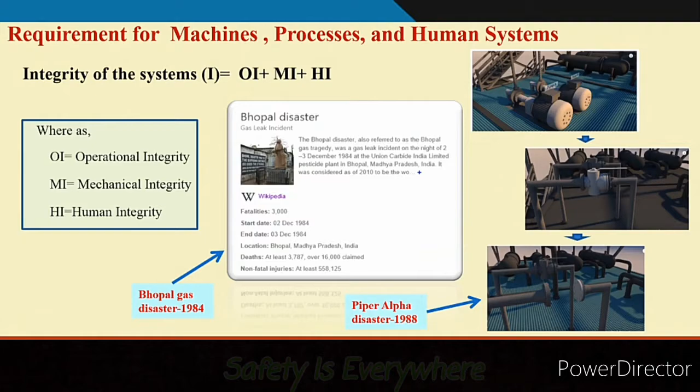So this first lecture which I am taking is on the introduction to OHSAS 18001. You agree, for any machine, processes, systems, equipment, the fundamental requirement is it should have three integrities. One is operational integrity, other is mechanical integrity, the third is human integrity.

What is this operational integrity? What is this integrity at all? The definition of integrity is that things, if they work as per your design, as per your requirement, it is called integrity. So whatever is designed, it should work in that fashion, that is called integrity. So operational integrity means the operations of the equipment or processes behave the way I have designed, the way the designer has designed. That is called operational integrity.

Let us take some examples of operational integrity. You heard of Bhopal disaster, which happened in 1984 in India, which is one of the major disasters of the industries. It happened on December '84. Many people died, around 3,000 people died. Many people had non-fatal injuries, about more than 5 lakhs. We cannot forget it. Why this happened? What is the reason for this happening?

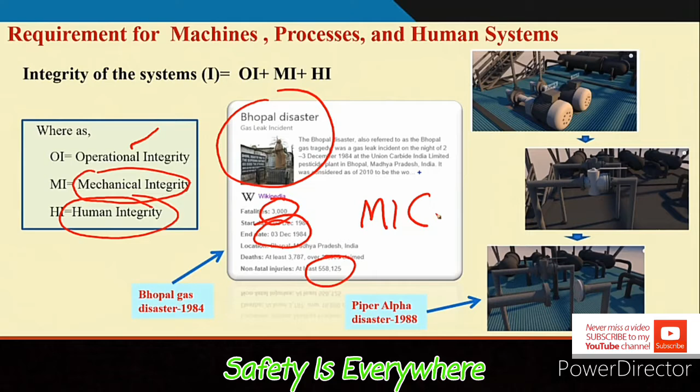The MIC gas has leaked. Why MIC gas has leaked? People say water has entered into the MIC chambers and there were violent reactions. Why did water enter? Somewhere operational requirements have failed. The designer never wanted water to enter into that. Designer never wanted violent reactions happening in the chamber, but it happened because of various reasons. So it has lost operational integrity, which no operations manager, nobody wants.

Second is mechanical integrity. Have you heard of Piper Alpha? It is under British government. 1988, Piper Alpha is an oil platform. In 1988, there was a major disaster in the Piper Alpha platform and the whole platform vanished. Many people died, around 120 people died or more than that.

In the platforms, normally oil platforms, families also reside, family members also died. It happened for a small purpose. What happened actually in the Piper Alpha? There were two pumps. They have to pump out the liquid gasoline or liquid petroleum products.

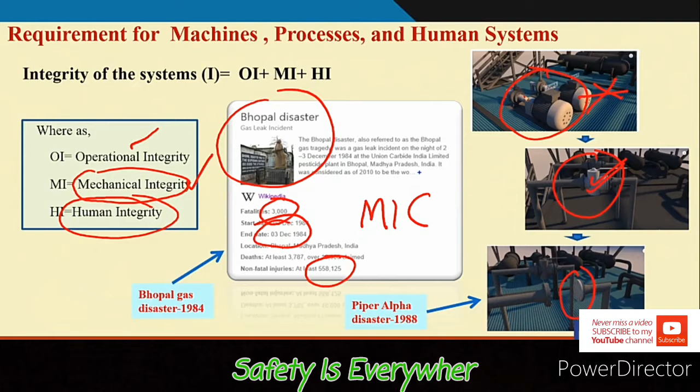the centrifugal pump would have kept on rotating, nothing would have happened. But the people have not tightened properly. They have tightened with looseness. As a result, the vapors came out from the flange and it caught fire, and the whole platform went off. What do you call it? Mechanically, it was not tightened. The mechanical integrity the people have not provided.

Of course, there are operational integrity problems too. The equipments which you have designed, it should perform the way you want. Finally, human integrity - people have to behave the way they are supposed to behave. People should have competencies.

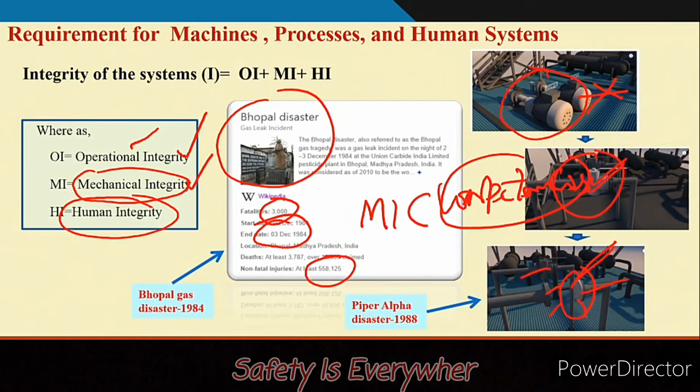Competencies to run the machines, to run the processes. They have proper training, and finally, they have to implement it. They have to follow it. If they don't do it, we call it failure of human integrity. When the operational integrity, mechanical integrity, human integrity is ensured, we say the integrity of the system is ensured.

It is very easy to tell, but there are lot of problems in this. Let us look at this - this is in a steel industry. I am giving you an example. In a steel industry, an integrated steel plant, say which runs having a capacity of 4 million tons, 5 million tons or 6 million tons, they produce 10,000, 20,000 tons per day.

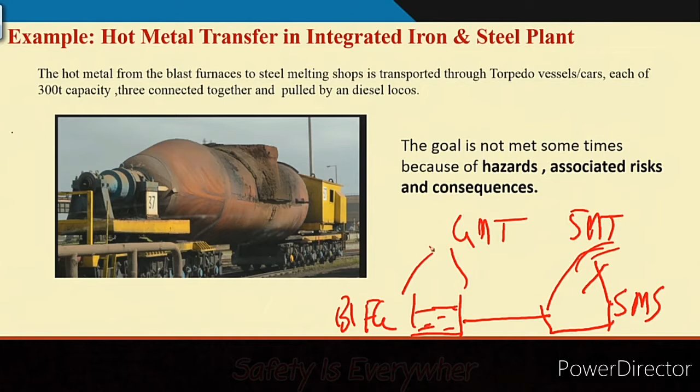It is a blast furnace where iron is produced. That iron will go to steel melting shops for making it steel. So iron will go to steel melting shops. This is steel melting shops, this is blast furnace iron. When this metal is made, it is sent to steel melting shops with a car called torpedo-ladle car, which will have say 300 to 500 ton capacity, at a temperature of say 1000 degrees centigrade, it is a refractory lined torpedo car.

To deliver properly hot metal to steel melting shops, the whole equipment should have mechanical integrity. The vessel should not fail, the drive wheel should not fail, the axle should not fail. If it fails, what will happen? With 300, 400 tons of hot metal at more than 1000 degrees centigrade, and there is an operator who takes it. Operator has to take it properly.

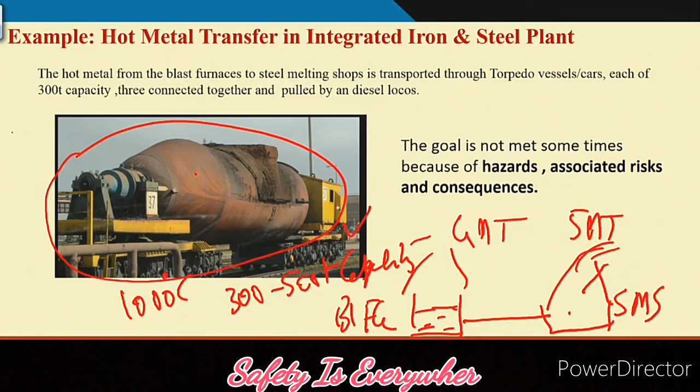If he runs at very high speed, maybe at the junctions, at the curvatures, it may get derailed, very difficult to derail. So operational integrity, mechanical integrity, human integrity. Operations means when...

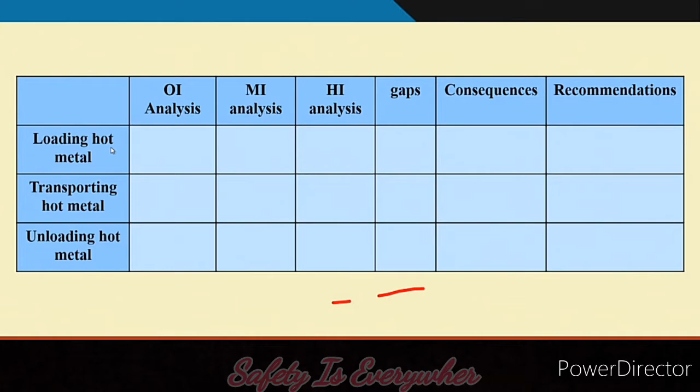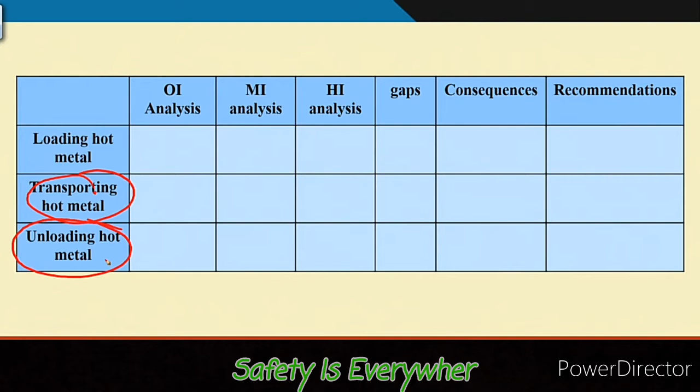What are the major operations in this? One is putting the hot metal in the torpedo ladle. This is putting the hot metal in the torpedo ladle. Second, transporting hot metal to steel melting shop. Third, unloading hot metal or iron, which is very hot, in the steel melt shop.

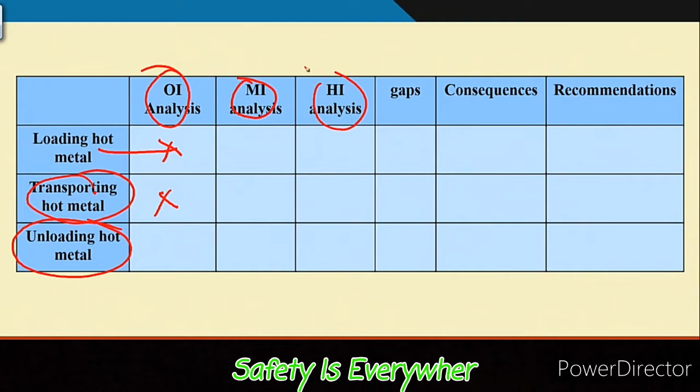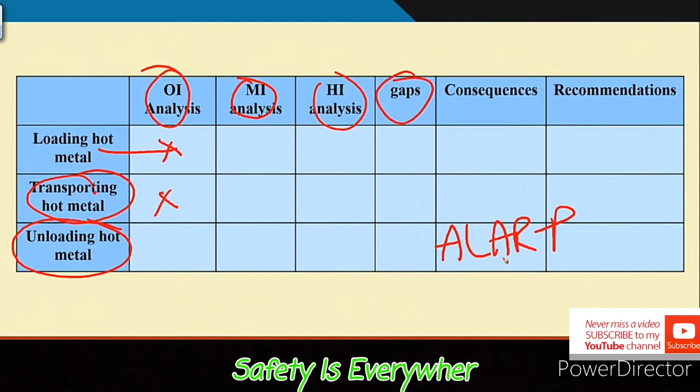So we can analyze what are the operational integrity problems in this. You can do mechanical integrity analysis, you can do human integrity analysis, if you have to ensure the integrity is there. If there is any gap, you have to see what is the consequence. So if it is ALARP level, as low as practically possible, reasonably practicable, as low as reasonably practicable - if it is at low level, then you can leave it. Otherwise, you should have recommendations how to bring the integrity back.

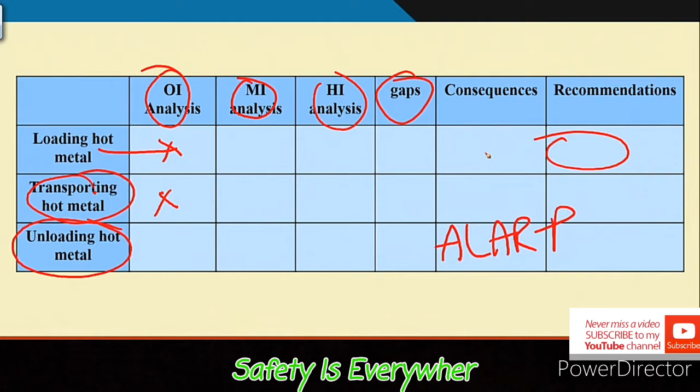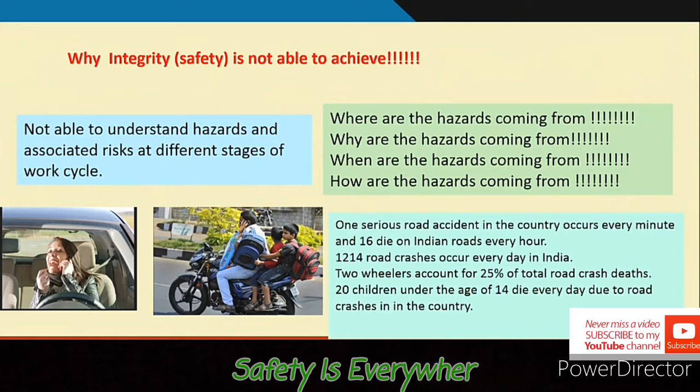This is one example of steel melting shop. Why can't we achieve this integrity? Why? Because we don't know what is the hazard.

Look at this. He is carrying 2 children to school. Why? To give prosperity to them. What is he doing? Talking on mobile phone, not putting helmets, overloading. He doesn't know the hazard. What is the consequence? If he falls down, what is going to happen to him, to his children? While talking on mobile, if he hits anybody, what will happen? He is not able to understand the hazard. Hazard is potential to harm, risk is the amount it can harm, and the consequence.

See here, why do these things happen? Every minute we have one serious incident happening in India, 16 people die on the roads every hour. So even 20 children under the age of 14 die every day. Still we do it. Why do people do it? Why are they not able to understand the hazards? Where are the hazards coming from? Why are the hazards coming from? When are the hazards coming from? And how are the hazards coming from? If we understand this properly, people will not do it. People are not doing it intentionally. People do it innocently. That is the whole issue.

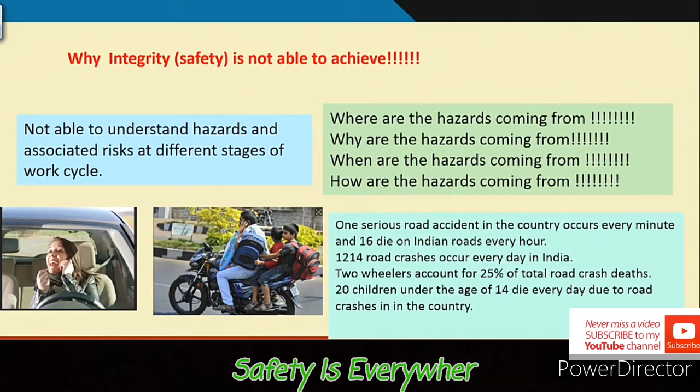These hazards are not created by others, we have created them. As Einstein says, when we designed this world, we thought everybody will behave as we think, as we design, but it will not happen. If the hazard is more, if that opens out, the consequence is more.

This also we have designed. We want speed, we want more speed, we want more comfort. So we have designed big roads. We have designed many cars running at very high speeds. This speed, the technology also brought associated hazards and risks in whole of its life cycle. That has to be understood.

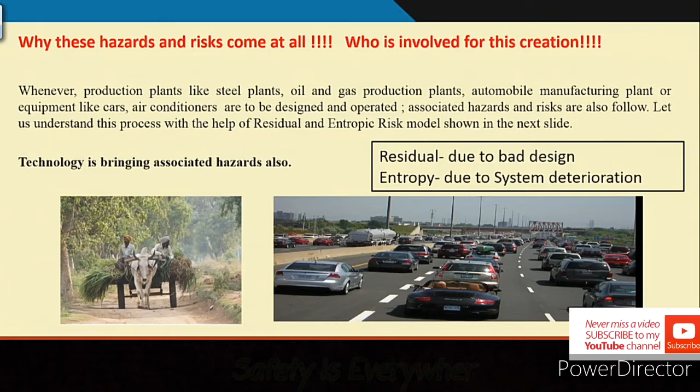So we said one is residual risk, other is entropic risk. What do you mean by residual risk? As a designer, you have to design processes, you have to bring technology. What technology are you bringing? Is it a two-wheeler with electric power, two-wheeler with diesel power, two-wheeler with petrol power or gas power? What technology are you using?

Physical environment - how is the physical environment? Temperature, wind, the whole of physical environment around where you are working. In the industries, if you work, if it is a hot environment, then the design should be different, if it is a cold environment different. Human resources - the designer has to think, what are the human resources required? What are the competencies required for running the equipments, for running the processes, for doing the maintenance, and that should be given.

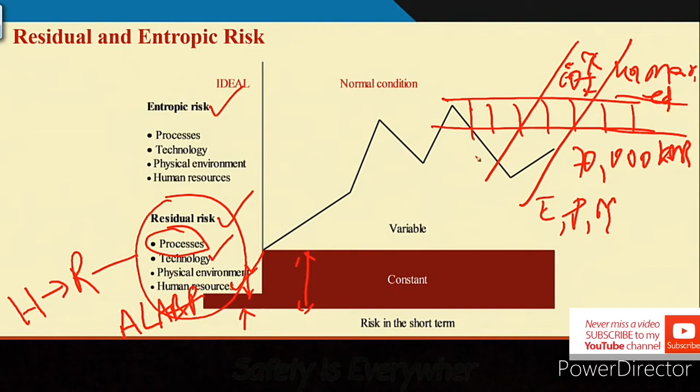Why is it happening? You have introduced a residual risk. If you put an underpass or overpass, this residual risk will be zero. Without putting it, we are forcing people to follow rules. That is called entropic risk.

The moment you put a flyover, it will cost more money and more place. That is why flyovers are normally not built, and it takes years and years. I have seen near IIT Kharagpur a flyover built after 65 years. In between, so many people died. So that is called residual risk.

What is entropic risk? When the systems degrade, when the processes degrade, when the technology degrades, when the environment degrades, or when the human resources degrade, then the risk will be increasing, and there are chances of meeting with accidents. When the risk increases very high, people will get down and bring it back. They keep on bringing it down, going up, bringing it down, going up. This is called entropic risk.

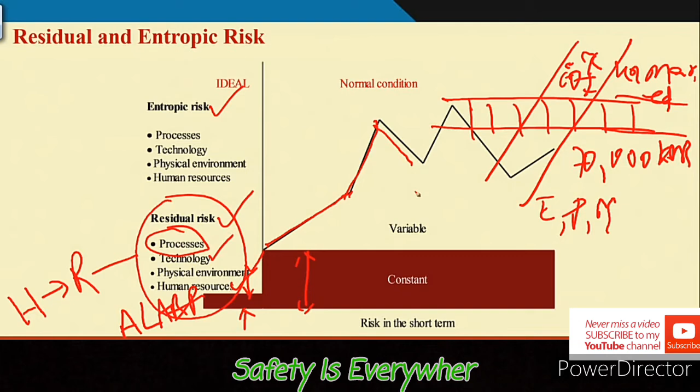So there are two types of risks. One is inherent or residual risk — I gave the example of railway crossings. Then we talked about entropic risk. Suppose a vehicle's brakes fail while going — we call it entropic risk. Or the examples I showed, like Piper Alpha, they are all entropic risks.

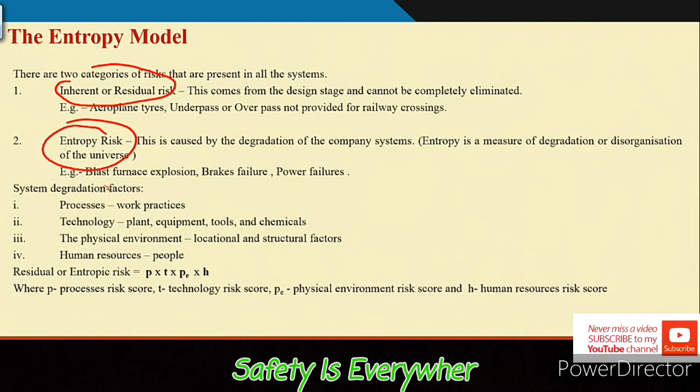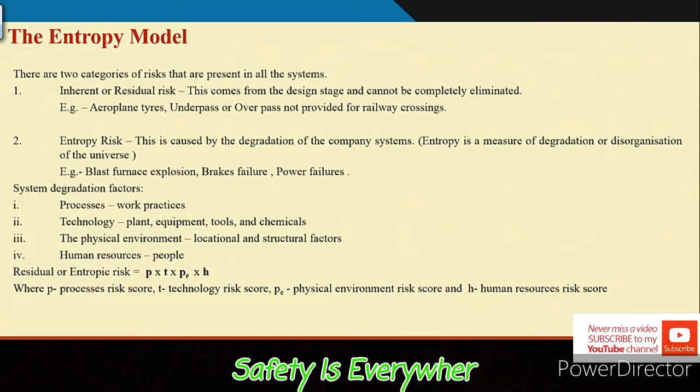When system degradation happens in all these four factors, the entropic risk comes. So residual or entropic risk is the multiplication of the process risk, the technology risk, the environment risk, and the human risk — multiplication of all four is the entropic risk. So if RR is the residual risk, RE is the entropic risk, the total system risk is RR plus RE, because of these four factors, as the addition of these two risks. We have to see that these two risks are within the tolerable limit.

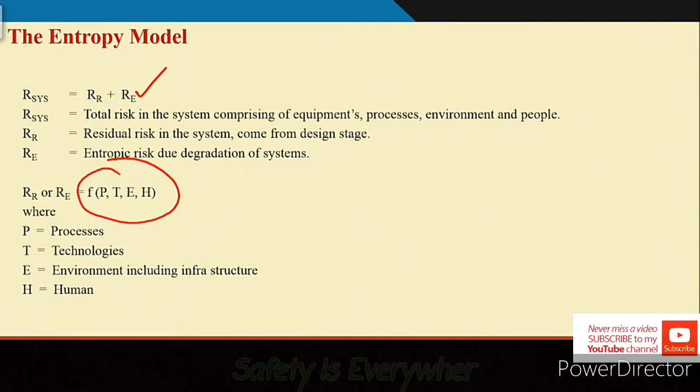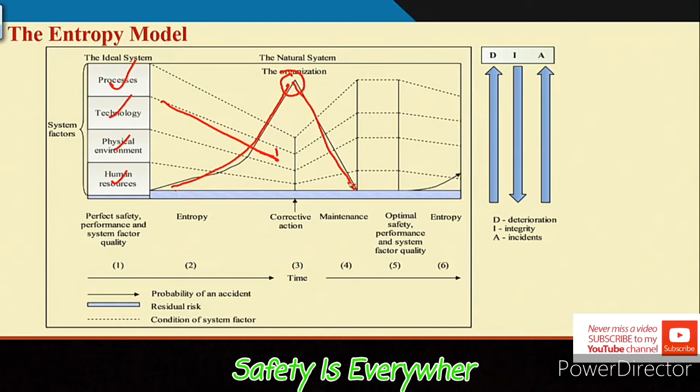Telling a little more: there are processes, technology, physical, and human factors. If the integrity reduces, then deterioration happens. When deterioration keeps happening, the integrity will come down. Why does system deterioration happen? Because of maintenance problems and operation problems. So when it goes to an alarming level, you take action and it will come down. If you hold it, it is good, then it will go up a little. So you do corrective action here — this is the optimal level.

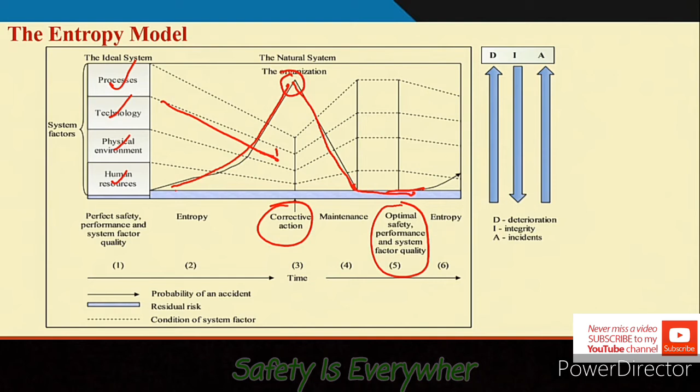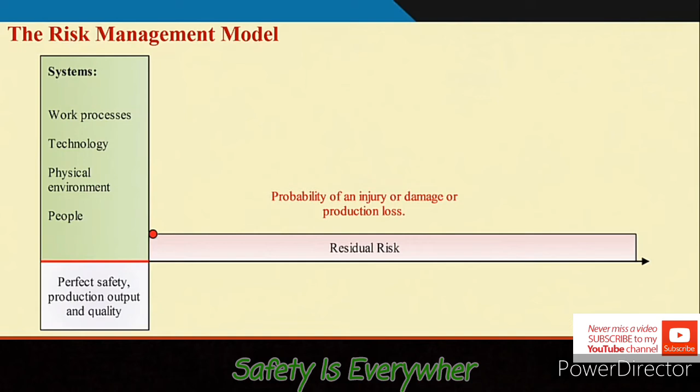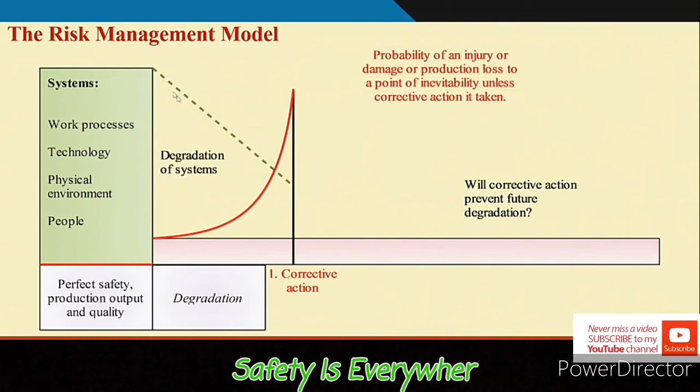As time goes, incidents will not happen and it comes down. Then what do you have to do? Let us see how it moves. Initially, when degradation happens, the incidents and risk increase, and integrity reduces. You take action by proper maintenance, then try to maintain it. Finally, if degradation happens again, it goes like this.

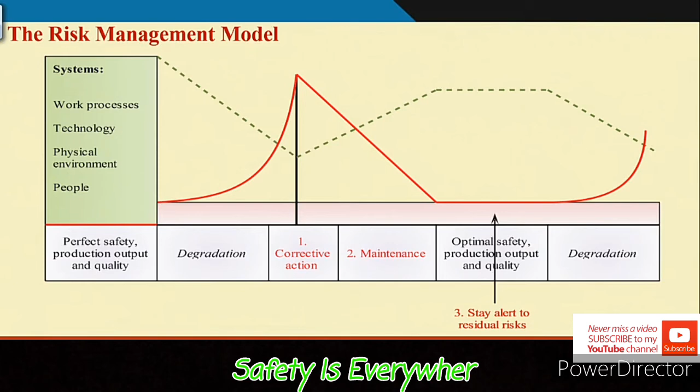Normally, when it comes here, you should hold it and try to reduce the residual risk. That should be the risk management model for occupational health and safety management. If there is any issue, first you have to address the entropic risk, then you have to address the residual risk, and hold it at the ALARP level. That is the purpose of the occupational health management system. Everybody would like to do this.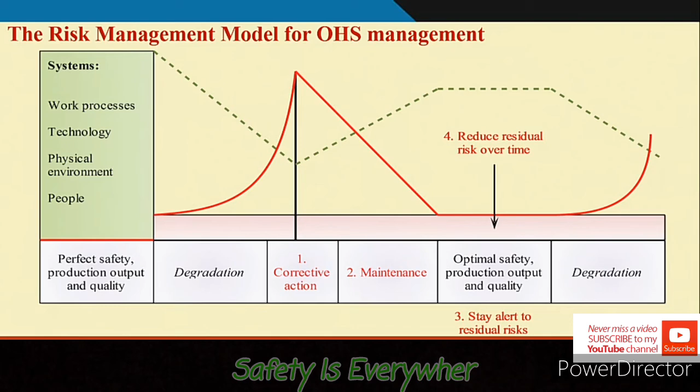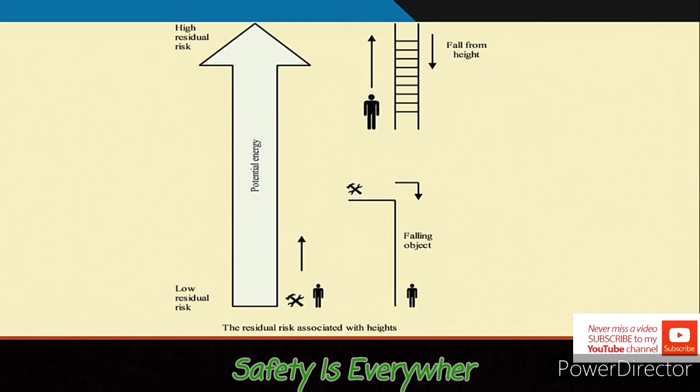These are some examples of how residual risk is introduced. If you put people working at height, you are introducing residual risk. If you reduce the height in the design, then the residual risk will be less.

There are four systems for doing effective risk management. One is to implement maintenance practices to prevent entropic risk, so that degradation will not happen. When you maintain properly and the entropic risk comes to a very low level, then you start working on the residual risk. If both residual and entropic risks are normal, whenever degradation happens, if you keep working on it, that is called effective risk management.

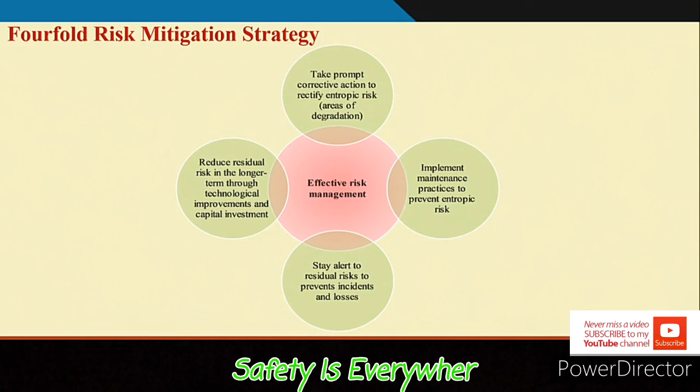Thank you. This is what we discussed: how the hazard will come, and who are responsible. Initially the designers, because of lack of competencies, lack of knowledge, lack of perceptions. Then later entropic risk will come because of operation people, operation degradation, maintenance degradation, human resources degradation — people have retired, and you have not recruited skilled people. Where entropic risks are managed well, for example like Tata Steel, after 100 years it looks new and young, because entropic risks are managed very well. Managing entropic risk, human risk, and residual risk throughout the life cycle, from design throughout, that is called OHS management. Thank you.